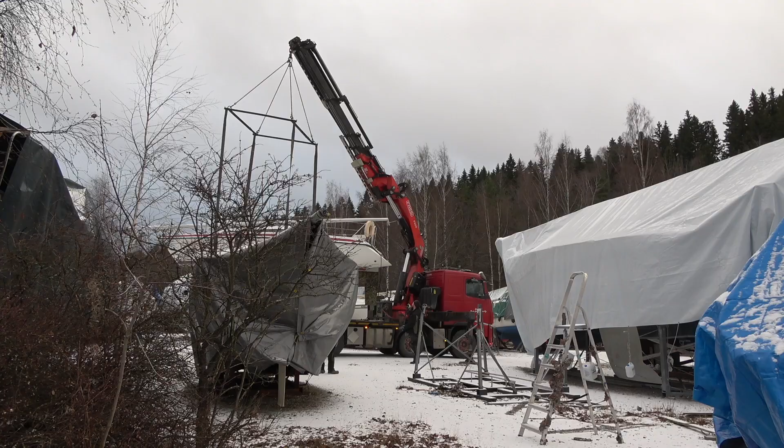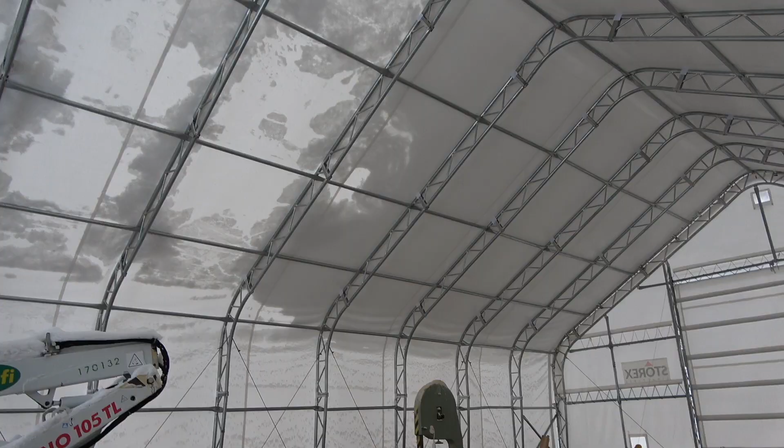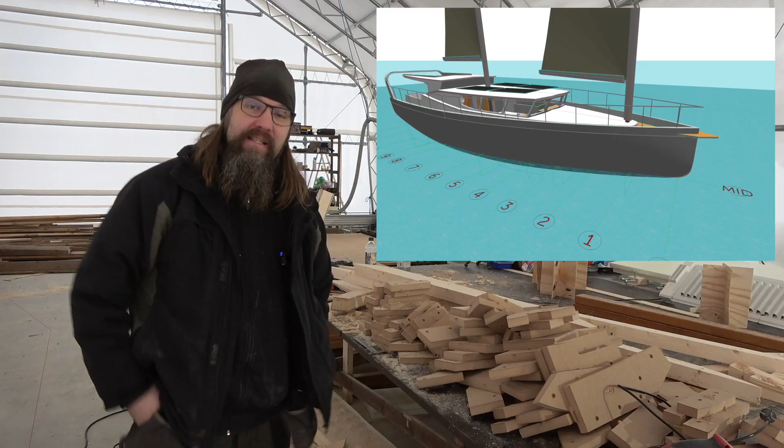It's now a week since I filmed the last video with the questions and answers, and I mentioned there that the epoxy should arrive this week, but it didn't, so I'm still waiting for it. But I'm still preparing everything for those next frames. So let's take a look at what I have done here.

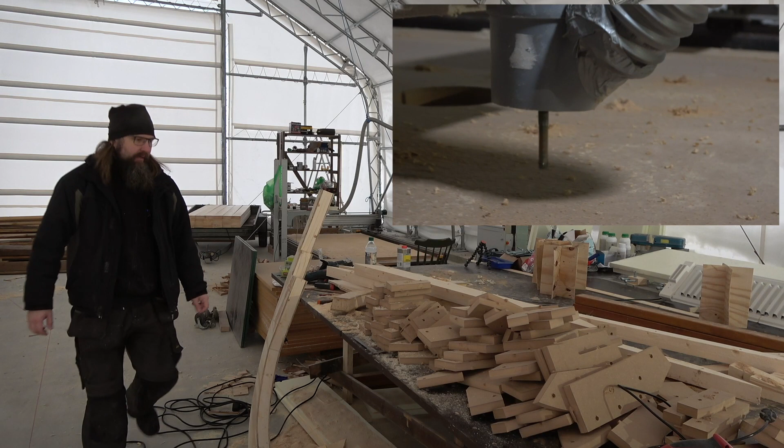In one video a few weeks back, I mentioned that I got this nice pile of MDF boards for free from a fellow that follows my channel and lives nearby. He dropped this pile in here. That is excellent news, because now I can make the molds for the frames from that MDF like this.

What I actually did was a little optimization - I took 5 frames at once and made all the parts at once. I think here is 2 of those boards cut into these pieces, and these are all the mold parts that will form the shape of the frame on the table. There should be 5 of them here, for 5 frames.

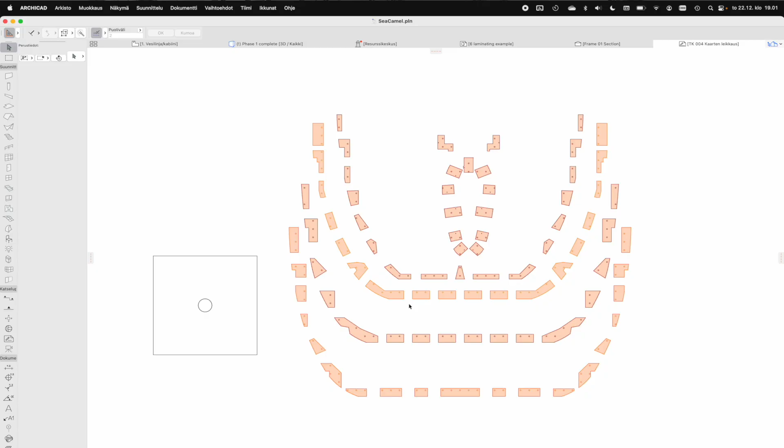As I mentioned, I did a little optimization. I took all those parts with the computer and used this neat nesting tool to put them all in optimized order into those boards and then just cut them out.

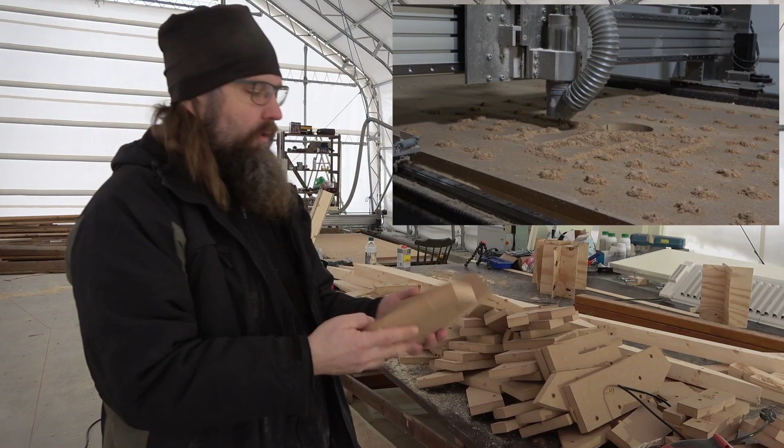And here are the results. So this is an example piece - it's one part of the mold. And there is actually 2 of them from each of those. So they go together like this, and it is pretty close to the thickness I need.

I still need to put a little bit of a spacer between here to make the actual thickness I need, but that should be pretty easy. There's these - this is 1 millimeter, there's 2, 3, 4 and 5 millimeters of these spacers. I can just put them between there. And now the thickness should be pretty close to what I need - a few millimeters more, but you get the idea.

So I can use this MDF, which is pretty constant, easy to work with, requires no actual preparing to do, and that is awesome. And then I did also these markings.

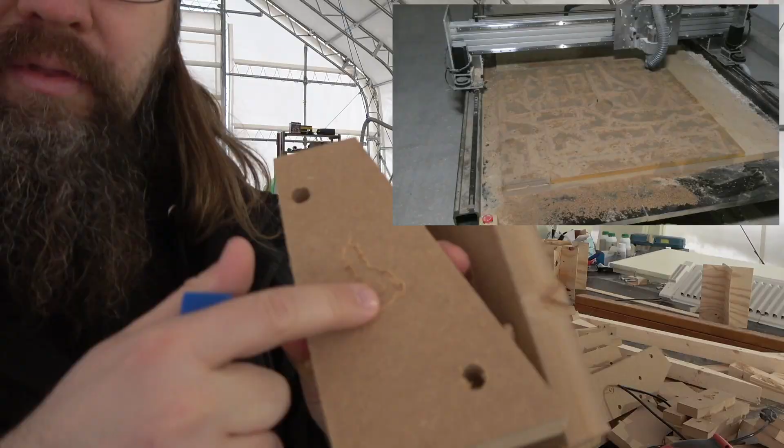This is a bit of - maybe you can see it - with these markings I can see which one is which, so every piece has one of these markings. This is actually clock kind of thing, so it is 4 o'clock, frame number 4.

These are all here, I just need to clean up them a little bit. And also what I did previously, a few weeks back already, was these floor pieces for all those 5 frames. There are actually 4 of them because the 5th doesn't have that floor piece at all. So these are all done and ready to go.

And what I'm continuing today is to cut the plywood pieces. It should be pretty quick process, but there's quite a lot of them. There is 6 sheets of plywood to be cut into these 5 frames.

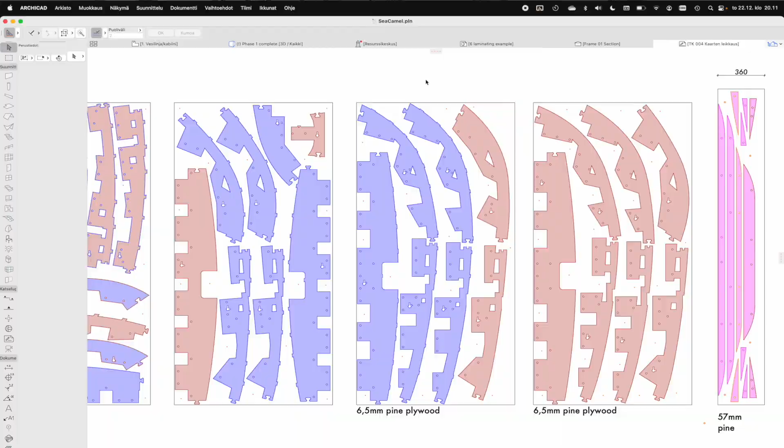There's a reason why I did the 5 frames to get a little bit optimized, because there is some waste always coming from the plywood sheets, and when I put more of the frames in the same cut, I can kind of lay them down to the sheets and get more pieces out of them instead of just going one by one. It is now minus 4 degrees Celsius in here.

Pretty all right, plenty of clothes on. It's dry, which is nice. And the CNC machine's cooling system has plenty of antifreeze on them, so it should be all right. Meanwhile, the machine is doing the cutting. I'm gonna make a proper cleanup with the table and everything here and organize a little bit. Yeah, work continues.

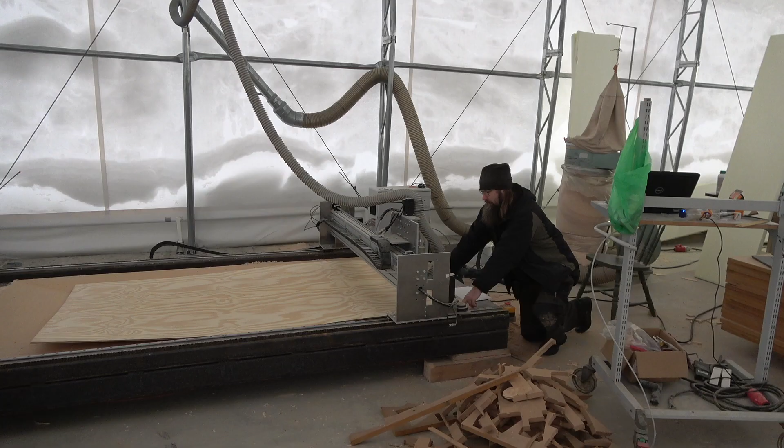You have probably seen all this before, but here you can just see how crooked these plywood sheets are when they are stored in the cold and a little bit damp environment. So I really needed to step over there and make it stay down when making these mounting holes.

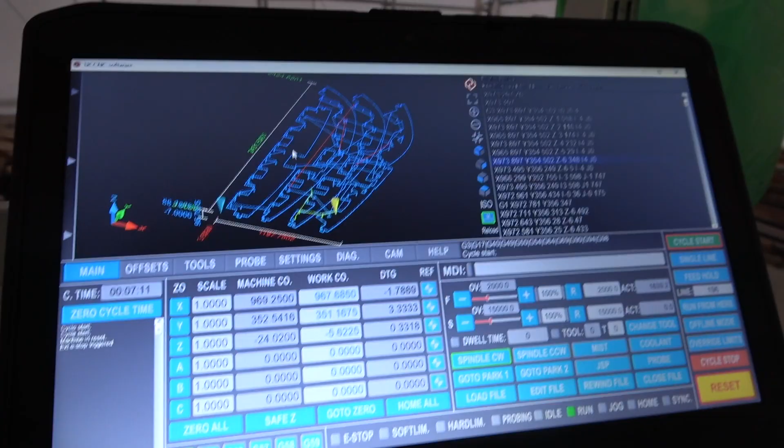With a feed of 2000 millimeters per minute, cutting a single sheet took a little bit less than an hour.

Just for the sake of fun, a little bit of a winter blizzard mission. I wanted to make sure the snow isn't piling up on the roof of the tent. Interesting weather, -9 degrees Celsius, let's see.

I have some visitors here. This is Jouko from Vendia Wood. They gave me that beast of a machine behind there, and I promised them to use my CNC for something. They came to cut these amazing boards. This is Vendia Wood, a special laminated plywood - it has oak veneer on top, and the rest is pine. Such nice stuff. We cut some pieces with the CNC for test purposes.

How does it look? Well, it's a learning curve, but I think quite promising actually. Accuracy should be plenty enough for you. They are making traditional boats from modern materials, and now there are some modern methods involved as well. Yes, it's a very interesting process to see, but these are prototypes, so there is room for improvement. And that bit wasn't actually a professional bit, it's kind of a cheap one, so we better try that result a little bit better as well.